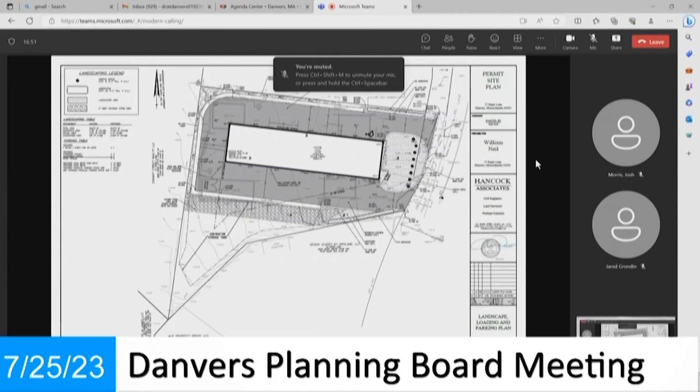Unfortunately we have this thermostat in the way, but the outdoor storage area is marked on your plan with a note. The outdoor storage area is all in this section here, up to the edge of the travelway. And what exactly will be stored there? Heavy equipment, such as backhoes, trucks, dump trucks, excavators—contractor yard equipment that's typically stored outside.

No other questions right now. Jean, questions? Can you talk about the current operations, and is that going to remain the same, like the hours, etc.? Yes, Mr. Neil has been operating at this site since 2008, and there won't be any change in his operations, other than they will be neater.

What are the hours? 7 to 3. Okay, the hours are 7 to 3, Monday through Saturday. Identify yourself for the record. My name is William Neil, owner, 17 Popes Lane. Thank you.

Any other questions, Jean? No, that's it. Tori, questions? I have no questions. Lou? Yeah, just a couple of questions.

Just following up on the question about the use of the property—so the use is going to be, in essence, the same as what has been before? Oh yes. Okay.

The only thing I wanted to note—and maybe this was just typographical—but in the stormwater report, it referenced construction of a self-storage facility. Was that just a typo? That's a typo. Okay, got it.

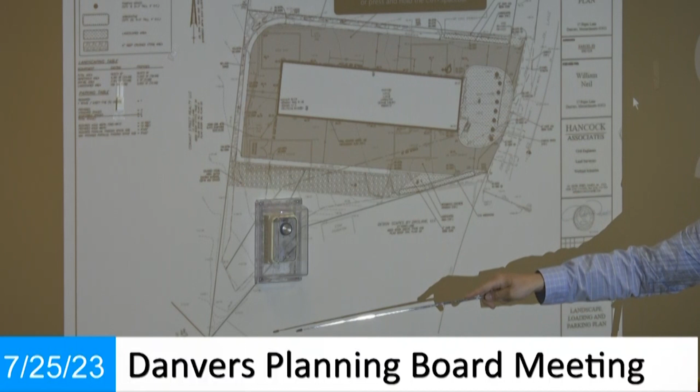Is that going to be improved upon, or is the existing fencing going to remain? There'll be landscaping over here for screening, same with over here. This fence up here is a newer vinyl fence, relocated to the property line a couple weeks ago, so it's already a nice fence.

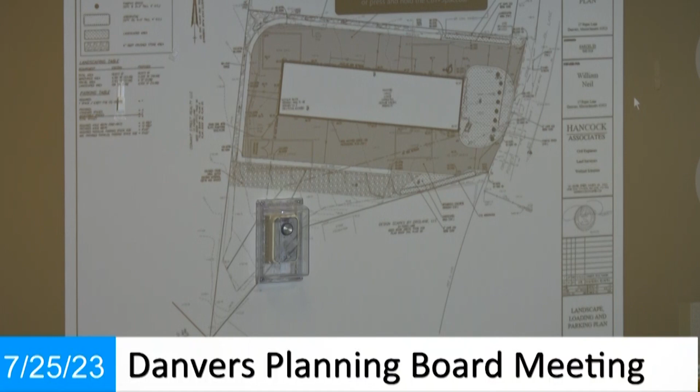No outdoor audio over there? Keep it quiet. And I didn't get the hours, I don't think we heard them for the record. The hours are 7 to 3, 6 days a week, not Sunday. Is there going to be any deliveries of material, or just strictly vehicles? Just vehicles.

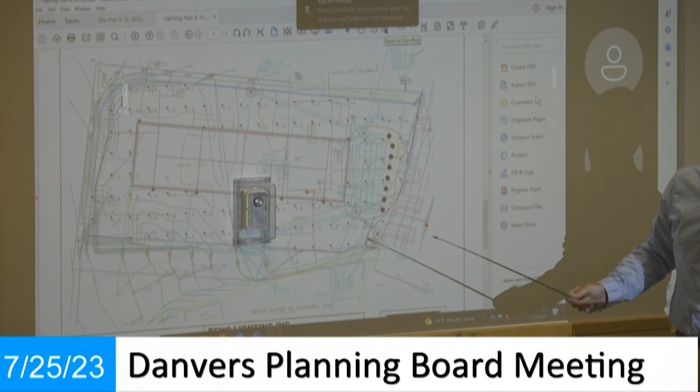We're proposing a ground-facing light over each garage bay, facing down, and two just on the back corners of the property, also facing down, more for security. The ones in front of the garage doors let you see what you're doing when pulling in and out. There'll be 0-foot candles at all the property lines. This wall surrounding the building will provide protection from any light going to the neighbors, and we have a line of arborvitaes here and here which will also protect the neighbors.

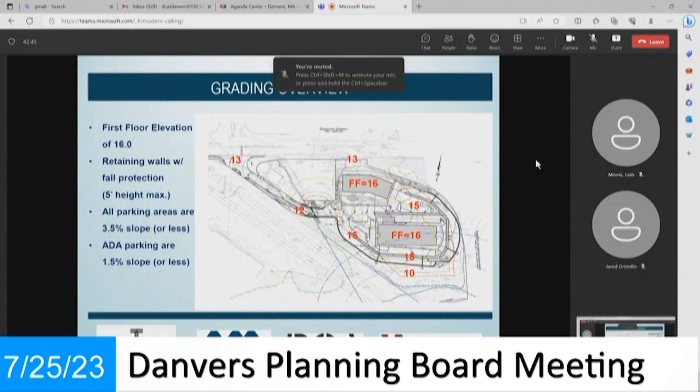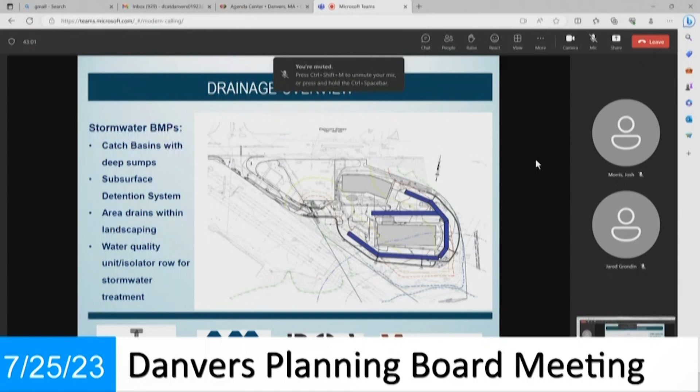So we have an underground detention system that's going to be located in the blue section. That is a water quality unit with an isolator row, and there's 4 discharge points to the rear of the site punching through the wall. Next slide, please, Josh.

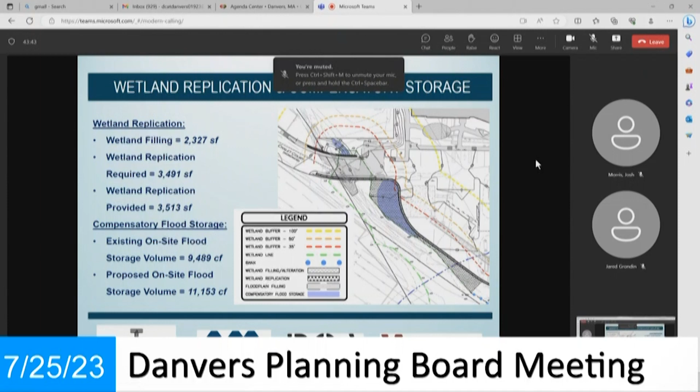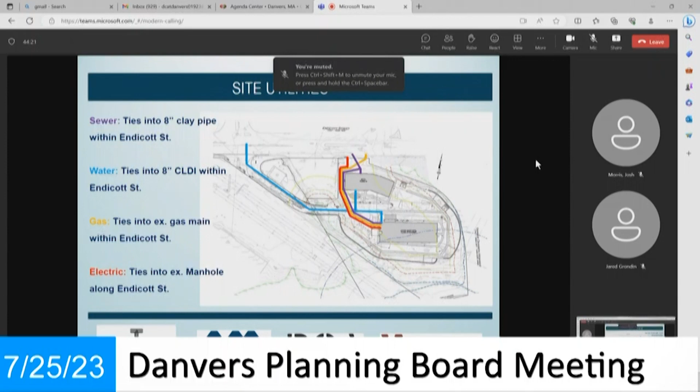Utilities are serviced with water, gas, sewer. We're tying into an 8-inch CLDI. Everything ties into Endicott Street right now. There is a proposed sewer pump station that we're working with the town on. We do have a location just to the left of Chalet Court as you enter into the site. So we are providing a location for that sewer pump station that's been in the works and planning for quite some time now. Next slide, Josh.

We are using the Viper. It's a 23-foot tall light, 6-inch reveal. All of this is dark sky compliant. This is LED, you can actually use your phone to dim these lights. Everything's going to be direct down with shoebox cutoff fixtures. Next slide, Josh.

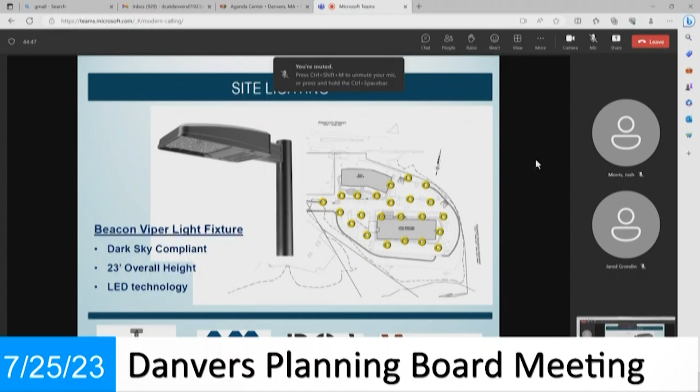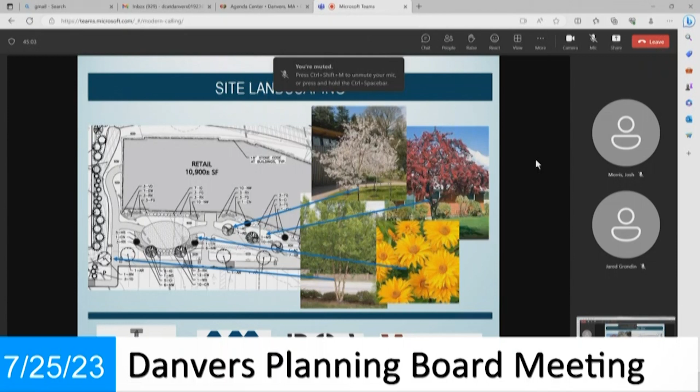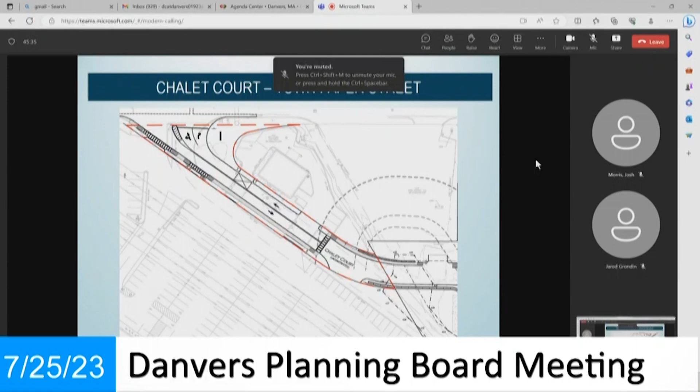So this is in red, this is the right-of-way in Chalet Court. This is a 40-foot wide right-of-way. We are proposing a 24-foot wide road with a 5-foot sidewalk that connects into Bed Bath & Beyond. We are controlling and having all of our improvements within that right-of-way, not going outside of it to make anything work. There are some parking spaces that would have to be reworked on the neighboring property. So next slide, Josh.

All right, with that, I'd like to turn it over to Jeffrey Dirk, who's going to talk about traffic. Thanks, Bob. Good evening, Mr. Chairman, members of the board. For the record, my name is Jeffrey Dirk. I'm the managing partner with Vanasse & Associates.

As you heard, I'm the transportation consultant on the project. So as you've got the two items the chair mentioned before you, I'm going to talk about the overall transportation study, which looks at Chalet Court's adequacy and design. I'll also follow up on what our attorney mentioned about the history and layout. More importantly, I'll focus on the creation of Chalet Court as it relates to access to this property, because it's important to look at how to access the property, the need for Chalet Court, and our coordination with the abutter.

But first, I'm just going to focus on the transportation assessment. We did prepare a full transportation impact assessment, and as the name implies, it looks at all modes of transportation—pedestrians, bicycles, and transit users—as it relates to the project, but also existing conditions in the area. That does form the basis of some of the improvements we're recommending as part of the project, which we will undertake with the requisite approvals.

The project, as we've looked at it and its impacts on the roadway network—our findings are that it will not have a significant impact on traffic operations. So when we talk about traffic operations, we're assessing what you experience on the roadway: delays, getting stuck in traffic, and how long you wait at any of the signals along Endicott Street. Those delays translate into backup, or how much queuing happens at an intersection. We're looking at those parameters before and after the project's traffic is added.

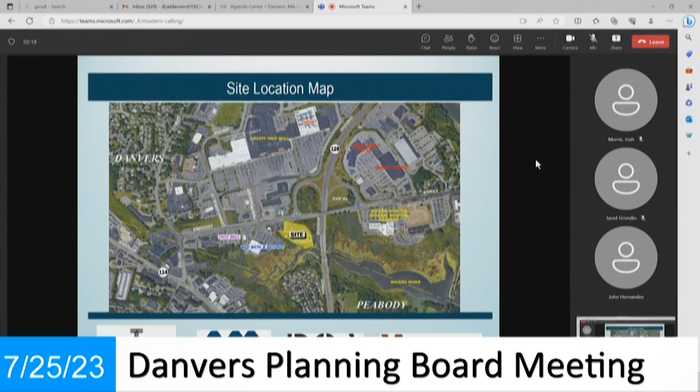When you look at the layout for Chalet Court, the planned improvements, you'll see we're establishing that connectivity at a signalized intersection with push buttons to be able to cross the street itself.

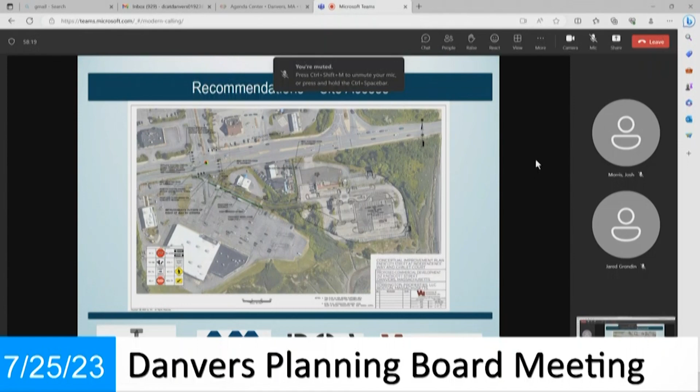So they establish no access lines to make sure no one can build a driveway opposite a ramp or some place where it would interfere with state highway operations. The other reason is to plan for future improvements. If in the future the state decides they want to provide a slip ramp onto the highway, they want to make sure no one builds anything in that area, to the extent that the Commonwealth would then have to purchase that property from a private owner. So they go in advance and establish these no access lines.

This property was actually developed prior to the establishment of the no access lines in this area. So when the Commonwealth recently updated the no access lines, they established one along the entirety of the property that actually did include the existing driveway. For some reason, they never enforced that provision. So the site was allowed to operate with the Denny's and the hotel there, and the Commonwealth never came in and asked for that driveway to be closed. But there is a no access line that goes right across that driveway.

The intent of the state was to have this driveway closed and Chalet Court constructed. But because Chalet Court was never constructed, they never enforced the no access restriction here. However, there is no access allowed to this property.

We went to MassDOT to see if there was an opportunity to retain this access, and in fact maybe move it so that it could come out opposite the ramps here. We had several discussions with the Boston office about what that might look like and what the requirements are. We do not have rights to that access. We have to demonstrate to the Commonwealth that creation of that access will not hinder the use or operation of the state highway system.

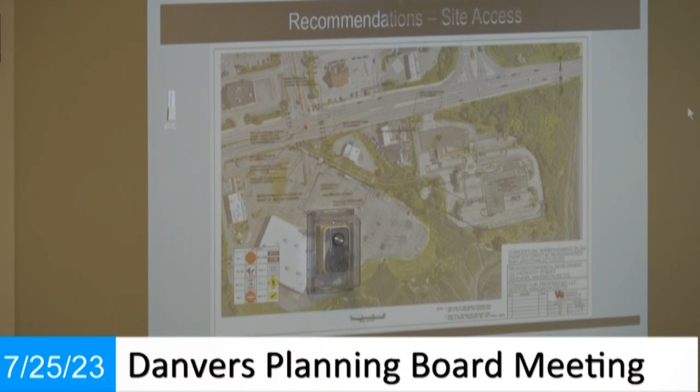We can go to the next slide, because I think that'll follow up on some other points I wanted to mention. One of the mitigation items, as we're reconstructing that intersection, is that the whole Endicott Street signals are part of a coordinated signal system - they're all interconnected and talk to each other. One reason you get that 30-mile-an-hour speed along the corridor is because it's timed so that if you go faster than 30 miles an hour, you're going to hit a red light at the next intersection, keeping traffic flowing within that speed.

So what we're doing as part of the project, as we reconstruct the intersection, is retiming and implementing an optimal coordination plan for all the signals along the corridor. As we looked at the impact of that with our added traffic, retiming the signals and reconstructing the intersection with Independence Way and the new Chalet Court, traffic operations after these improvements will be either equal to or better than the conditions that would exist if this project was not built - basically a betterment or no-harm condition over what we term the no-build conditions.

So what we're doing is essentially not only offsetting the impact of the project, but in some instances, like the Chalet Court case, we're actually making things better by reducing delays or vehicle queues or both at the intersections. That's again a mitigation commitment as part of the project itself.

Lastly, as I mentioned, we do have opportunities to reduce traffic and parking associated with the project - transportation demand management measures. We have a series of recommendations the applicant will undertake, designed to make sure people understand there are opportunities using bus service, walking, and biking to the site, providing information on availability, service routes, and times for the MBTA service, to not only employees but also hotel guests.

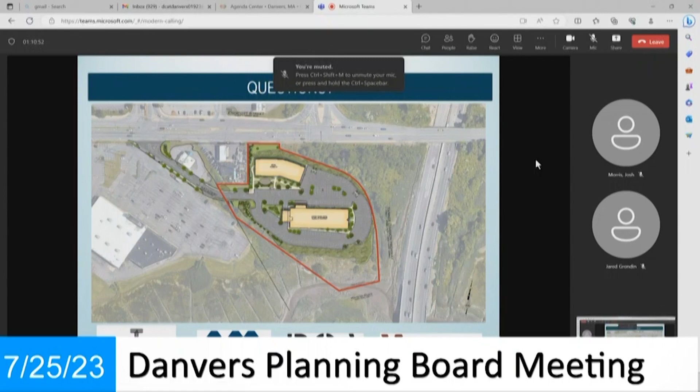Based on some schematics provided by the abutting property owner, there was a desire for a driveway close up to this area, and also a desire for a driveway back here. I think what'll happen is, if someone's trying to get out of the driveway close up here and there's one or two cars queued, you're going to need to wait to get out. I think it's not going to be much different than what would happen today with 1 to 2 cars there, but now we're adding some additional traffic.

That's why this additional driveway in the back and the connection is important, because a frequent user of the plaza here might recognize that with Chalet Court being constructed, it's actually going to be easier to come out here and then get at the back of that queue and get processed by the signal.

What's important as we're looking at it is the wait times for someone who's exiting with the improvements in place are not going to substantially increase. It's only going to go up by a few seconds, so the wait times for someone exiting is not going to be significantly different.

But as a motorist, in terms of choosing where to enter, right now it's kind of a free-for-all, because there's no curb, no real impediment to cross and get into the roadway. So now this will actually be safer because we're organizing it into 2 driveways.

As a user, you'll decide it's probably going to be easier to come out at the back here, and you're not going to wait that much longer coming up to the signal. So we've looked at it in terms of how it will impact those users, but clearly there's no traffic really other than the bank impeding them going this way, and now we're going to have the use that's here.

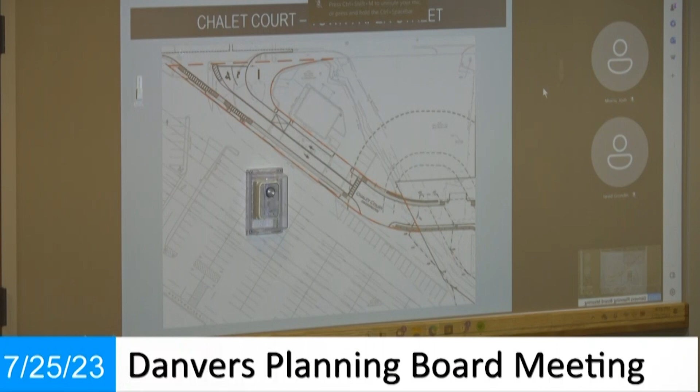So basically this is uncontrolled as it relates to accessing the Chalet Court right-of-way. Today you can just shoot across from Bed Bath & Beyond and stay there. So the issue is if you do have queuing that happens along here and someone tries to come in, potentially it's difficult to get to the back of the property that's there. So this is trying to organize that a little bit better.

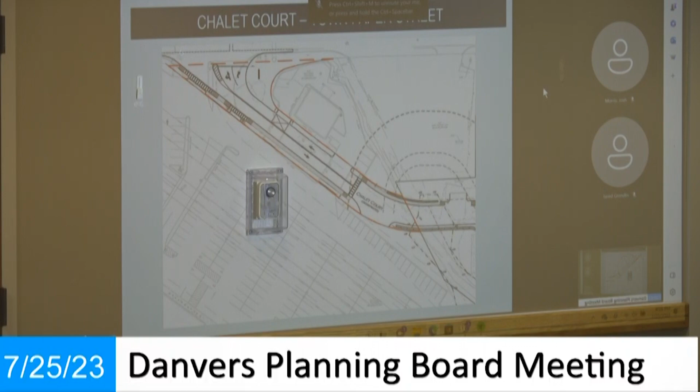But again, we'll be working with the abutting property owner to find out where they'd like their driveways along this layout. Yeah, I think that would be something very important for me to see, that you are coordinating with that property owner, because it seems like this has great potential to affect convenience of access and egress from their property. And it's an intersection that can get backed up in all kinds of ways. Right, so I think we've got to proceed very carefully and deliberately.

That said, this all looks a lot better than the Denny's. Yeah, and hopefully when we come back with a plan, after they've had a chance to digest it, we can put some flow arrows on it to show all of those different paths of entering and exiting that property, so you can see where any conflicts might arise.

Thank you. Thanks, Tori. Jean, do you have questions at this point? No, I don't have any additional questions. I think everything was answered.

All right, Tim, questions? A quick question - I know we have this letter here, so some of my questions may be based on what's in here. Does that need to be read into the record? Oh, this letter - so we're going to take the input from the applicant.

The board's going to ask its questions. Before we open it up to the town public, we will read into the record the letter from the developer, the abutter's attorney. So we're not going to get into that just yet. Okay, I did have a chance to look at it, so if you had questions related to it, I don't know if it's out of line, but I can certainly try to answer some of them.

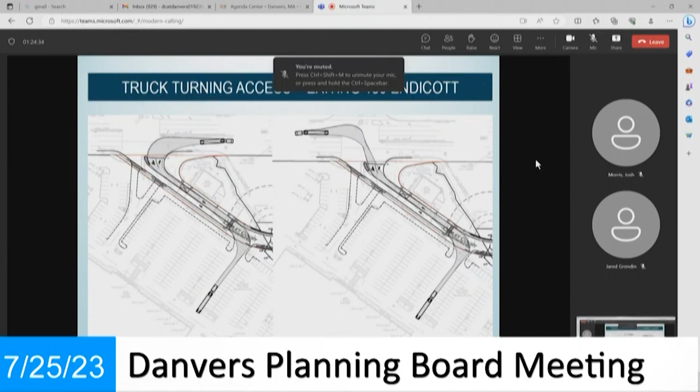I think it's important to know that we were trying to make this work within the right-of-way that was there without having to utilize their property. Obviously we're trying to make those connection points. We did an overlay of what they gave us versus what we have, and we feel it's obviously very close, but our goal is to work with them. We want this to work for everybody. It creates a nice, safe access point to our site and to their site. So it's just an effort between us and them really getting together now that we've put this forth and they've had a chance. I think we sent the TIA back in May, and we sent the overlay and these plans probably about 4 weeks ago. So now it's really working together to figure out how it works for everybody. But the goal was to make it work in the right-of-way because it was designed for that intent.

Understood. That's it for me. Thanks.

All right, thanks Tim. Just a few questions. Trying to understand the movements between the two buildings, between the hotel and the retail. Is there going to be some wayfinding and/or demarcation to differentiate the parking for each site on the plan, or maybe you can indicate that?

Yes, so we have two-way coming in, one way in and one way out here. There's a 24-foot wide road, these are all 24-foot wide. There is head-in parking here, there's an island in this location, there's parking here, parking on the perimeter. So you can circulate around here, flow back out. You can come in here, flow all the way around the hotel. This is 60 feet from here to here, which is an 18 and a 24-foot drive lane all the way around, two-way circulation.

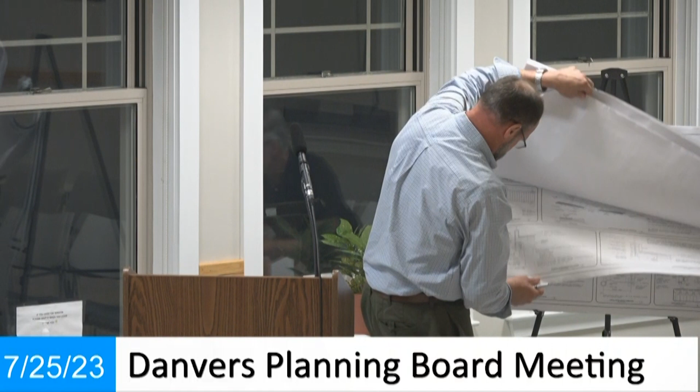We can obviously consider 8 feet if it's not already proposed on the plan. I believe the town, after higher than 7 feet, you've got to get it all permitted anyway, so it would just be showing on the plans.

That's just a concern, but I'm assuming that the only people who would have access to the trash are going to be the employees of each facility. Yeah, for the most part.

I'm sure you're going to go over some signage - do you have signage that you're going to propose that's off the building? Is there going to be a marquee sign? There would be a sign package under separate submittal.

If you want to go back to the elevation, Josh - right now they are proposing 2 signs on the building facade, one on the front and one on the rear of the property. There's a sign right there that's on the Endicott side.

And then if you go forward, Josh. That's the beginning slide, so advance it, go forward. So there's the back.

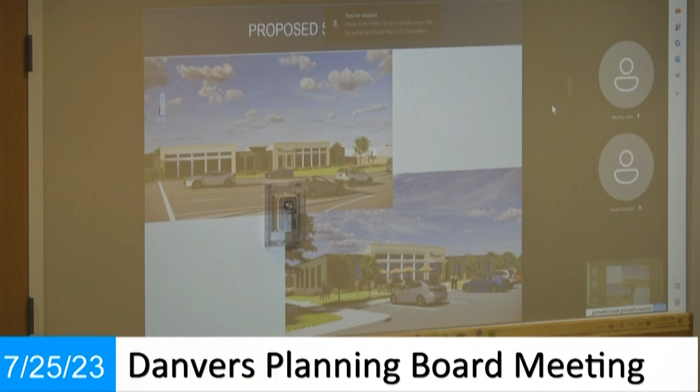So we're not putting a billboard on 128. If you go to Chalet Court, Josh, keep going forward - we are showing a monument sign in this location within the right-of-way, and that would meet the square footage requirements of a monument sign.

So you're going to have a marquee sign out front there that will - correct, it has tenants on it, calls out Fidelity and whatever hotel comes. You'll share that with the current - would it be for tenants of this development, or just for this development?

Yeah, they have their own - further down, right now there's a right-of-way, it makes sense to put it here versus in this location. So there is one shown on the site plan, and we would be coming in with a separate sign package, most likely to the ZBA, for that extra wall sign.

Yeah, we would need to see those as well. The signs would typically go, we would see the signs. And the wayfinding signs and directional signage inside the site, showing the movements inside the site, we would get those as well. Okay, we can add that.

Okay, great, thank you. All right, I'm sure you're going to pick up, so what do you have left for us? I'm assuming you have landscaping, maybe concept plans, colors, snow storage, and the drainage study. Anything else I'm forgetting?

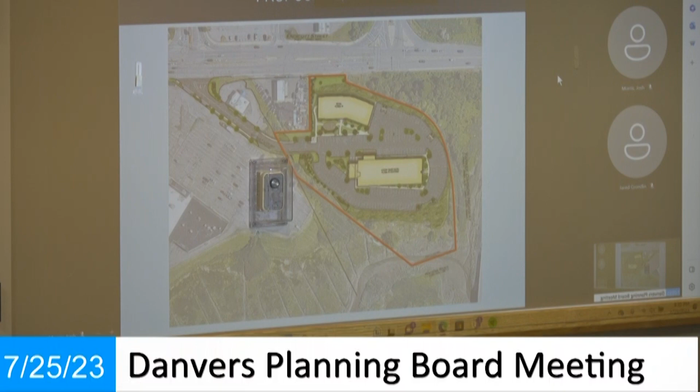I think this is the last slide, Josh? If you want to go back to the lighting, I can go over the lighting again. Oh, okay. Are you going to present, is that your presentation on the landscaping, or do you have a landscape architect? I'm actually a landscape architect as well, if you want to get into plant species and specifics on trees.

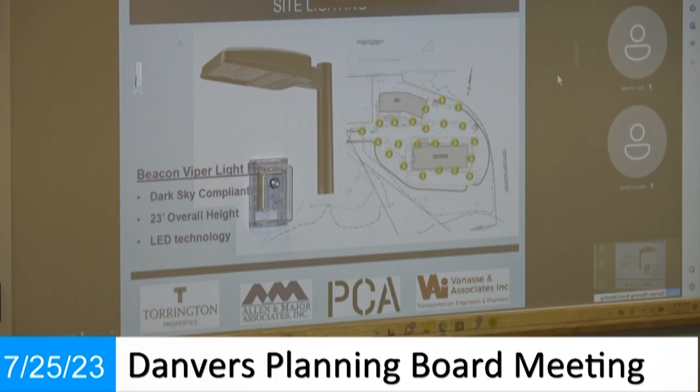Yeah, there's a full planting plan and planting schedule in the plan package. I don't need that. I'm just, do you have the percentage of landscaping versus impervious surface once you're completed?

Yes, so the slide on the front shows the zoning that we are at. The impervious cover is required at 80%. We're at 53%, so we far exceed, we're under the 80% max. There's existing 69%, so we're increasing the green in the impervious surface coverage. There's also the building coverage, which is 50% required max, and we're at 14% coverage on the building.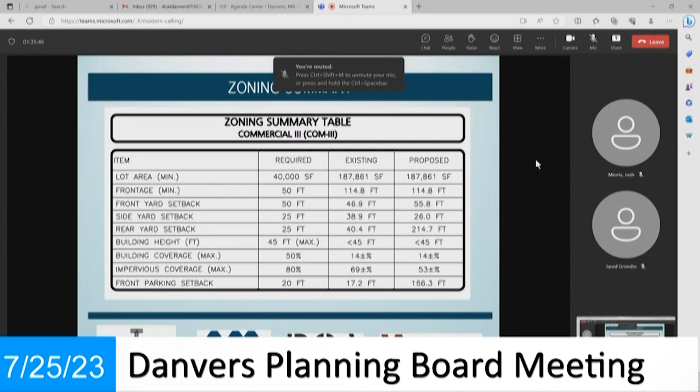When you go back up to the parking table, I just had a question on that, that you started with, I think, originally. You mentioned the 180 spaces. Is there gonna be, how are the spaces gonna be, do you have the breakdown? Yeah, that's on the plan package, but I can go over it.

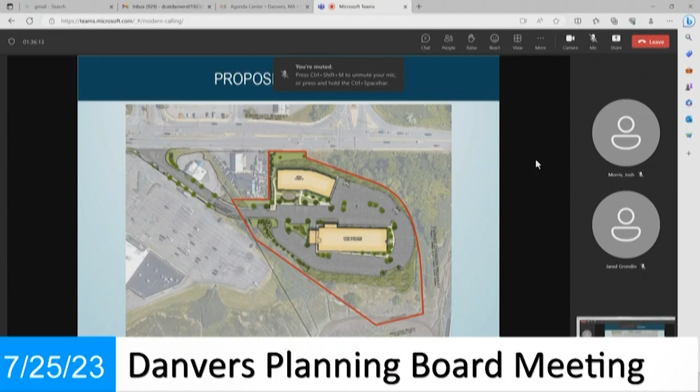Denoted on the site, I guess, on the parking, on the site? It's on the layout plan. See, you have your plan package, and that gives the breakdown. So C-102 has the breakdown.

I could go through it, I have it on my notes here. So you get one space for every room. So that's for the hotel, you've got 95 rooms, and then you have one space for each individual employee. They believe there's gonna be 6 employees at a shift. So that gets to 101 parking spaces, and we've provided 101 parking spaces for the hotel.

The retail is 1 per each rental unit, but we don't have any seats, so that really doesn't apply. So on the retail, it's 1 per 250 gross floor area, and then 1 for every employee on the largest shift. So the way that counts out is they assume 35 employees, and that's 79 required and 79 provided. So if you add the 101 to the 79, that's the 180. So the hotel's at 101, and the retail is 79 spaces.

So I guess the question that's brought up from staff is, do you believe that we'll need all those spaces? We're following the regulations of what's required and what's provided. You know, I don't think a hotel would ever be 100% occupied, but we're following the regulations that's in the zoning.

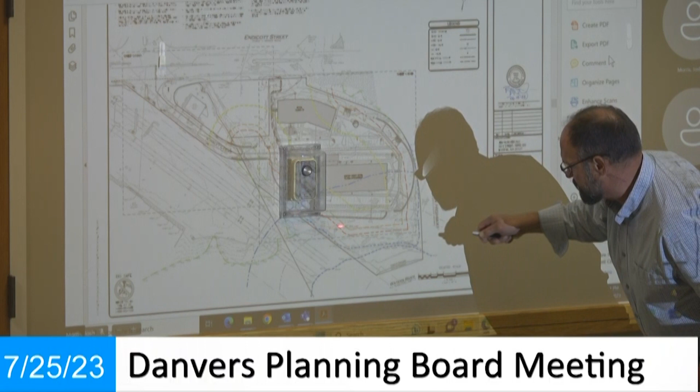Oh, I can see it. Well, it's all a 30-foot wide easement. What sheet number is that? PDF page 10, thank you. C-104.

Yeah, right there it says gas, right there it says gas. Right now that orange line is a 30-inch gas line. I see, there it is, yep. So what we did is we removed all the pavement in here, and we have an access point down. We've already met with them on site last week, showed them this access. They had no issues. We're staying out of their easement, and that was also another reason to revegetate in the riverfront area.

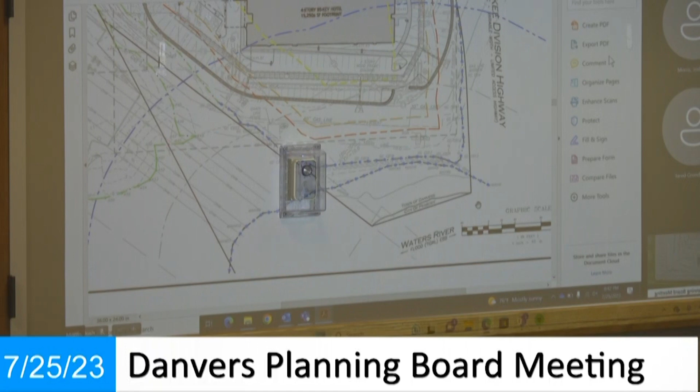Just on the landscaping, I guess, if we could just give a little detail for the record. I know you have the plant submittal, and we've talked about the percentage and so on. I assume drought-resistant plants, we're not going to have sprinklers.

Jim, where did you say the geographic location is? Where did you say you'd like to see the landscaping on the plan? I'm assuming they're drought-resistant plants, and we're not sprinkling this, correct? Or are we? Pete, do you think you're going to be sprinkling? Or is it well water, or is it going to be town water?

We have town water right now. So when you're coming into the site, we have deciduous trees planted right along the corridor here. This is where a vegetated evergreen screen is located. We have Quercus, oaks, in these islands here. Everything is drought tolerant, everything is natural, native, and we don't plant any invasive species. In this area, we have a couple of Acer rubrums, red maples, right in this location.

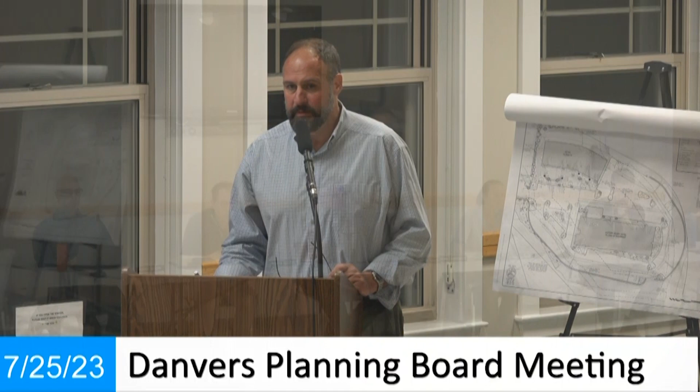Just picking up on what Gina just mentioned, looking at L401 - note 7 on the loam and sod notes says: if proposed irrigation system is not operational, landscape contractor is responsible to water with temporary irrigation. That would suggest to me that since it says 'if proposed irrigation system is not operational,' that means there is going to be an irrigation system.

Correct. So the note really means that the contractor has to guarantee the plant material - they have to water the plant material during construction. So if this is a 6-month or 8-month project, that note's intended to have the contractor on the hook for that. But there will be an in-ground automatic sprinkler system? Yeah, there will. And it's going to be tied in with town water versus well water? It would most likely be tied in with town water, sure.

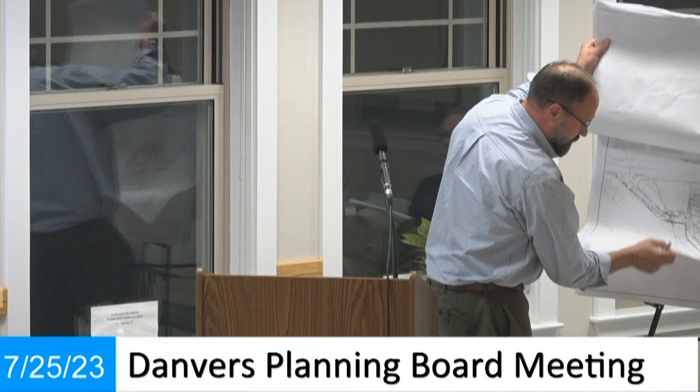Snow storage on the site - do you have snow storage areas that you're going to delineate? Yeah, so if you want to go to... not sure if we really showed it, but typically we would show it on the layout plan. Want to go to C-102, Josh? We can add in the bubbles that show and depict snow storage.

Yeah, we don't want it dumping on your nice new plants, or in the wetlands, so it's gonna be a tricky spot with all those parking spaces and maneuvers. We have a requirement, like across the street at the mall and similar commercial sites, that if we have over 10-foot snow mounds, you gotta take it off-site. You got a pretty active site there, hopefully very active with hotel patrons and customers, so you're gonna need to probably truck off a lot oftentimes, because if you're that close to wetlands and using salt, there's probably restrictions. Yeah, typically there's a condition that if the snow gets too high to manage, they have to remove it from the site.

But there are islands here, in these two locations. This location here, I don't think you're going to want to be pushing it back to the river. And you're not really going to want to pile it up against the building, so most likely they'll have to remove most of the snow from the site during big storms.

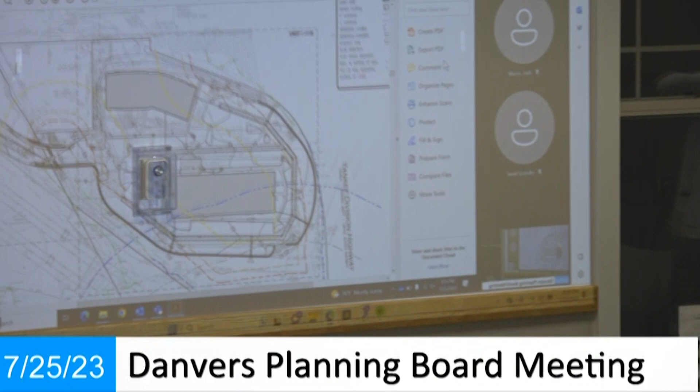So, C-103. I already mentioned the elevations of the site. We're at 13 up at Endicott. These two pads are set at 16. The overall site is 15. This is a large underground detention system here and here. There are 4 discharge points in this location, here, here, here...

So basically there's a 4-inch underdrain that discharges, and then a 12-inch overflow, so there's 1.5 feet of freeboard through this entire system. It has an isolator row, and also the deep sump hooded catch basins. We also have a water quality unit handling the road because we don't have detention out here, so we have a large water quality unit out on Chalet Court for treatment. But the isolator row, and because we're reducing the amount of impervious surface, we're meeting all the state standards for decreasing in all storm events. As mentioned, that will be peer reviewed by Hancock during the Conservation Commission process.

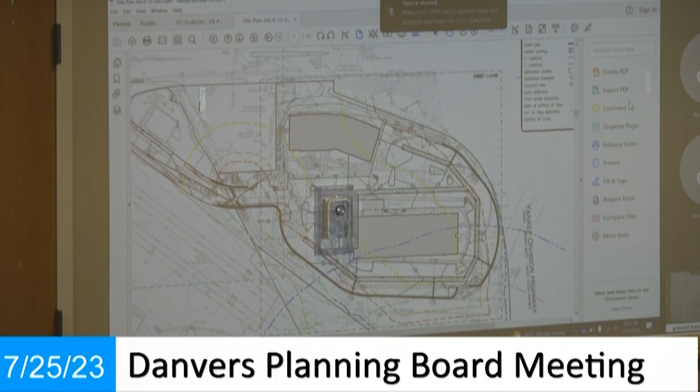Questions from the board on the drainage, or anything to date? Tori, no. Lou has a question? Yeah, just a question - it came up because looking at one of the renderings showing the outside of the building, similar to Fidelity, it looked like you had picnic tables and umbrellas. Now, my understanding from what's been said so far is the hotel will not have any sort of restaurant associated with it.

So there's not, similar to Fidelity, a cafe or anything like that planned. So if someone wants a cup of coffee, they have to leave the site, correct? Yeah, it's basically for the employees for their lunchtime - a sitting area where people bring their lunch, or have coffee, office type setting, but it's not open to the public and there's no restaurant proposed, nor any anticipated cafe. No, they have a kitchenette. Got it, no grease trap. No. Okay, no fried chicken or anything - they've got plenty of places down the street they can walk to.

Just again, for the record, could you quickly go over the lighting plan? Sure, show that please. You want the number, John? Sure. Would this suffice, Bob, on the screen? Well, yeah, you could use that too.

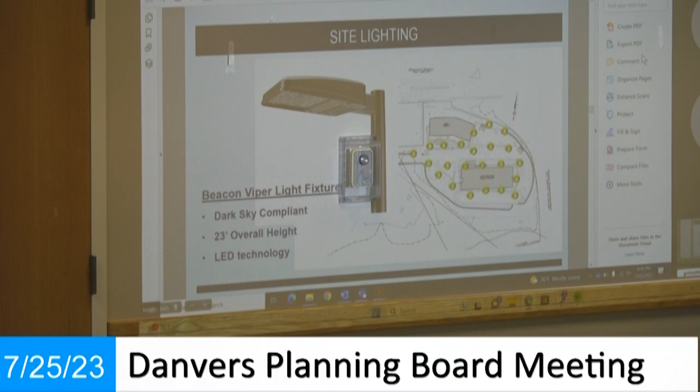We did do a photometric plan, on C-105, that shows we zero out pretty much at the property line. There's nothing proposed on the side of Endicott, between Fidelity and Endicott Street, for lighting in that location. Lighting on the buildings - do we have any bollards? Do we have lighting on the building themselves, entryway lighting - all that needs to be shown.

Good. Anything on the buildings? We'll show those, we'll add those to this plan. It's going to be minimum lighting, code required at the egress points, and like the service door for the main point of entry room. Signage, will signage be lit or not?

We'll have to confirm all that with the signage consultant. We're going to use a consultant that will design the wayfinding. They're Fidelity's preferred signage vendor, and then they'll also work with Greg and I on the monument sign out in the right-of-way. Okay.

What else? Other questions from the board at this point? I think I've got everything on my list.

Before I turn it over to the public, we are going to read into the record: Attorney Nancy McCann is representing the abutter, and she asked, because she had another meeting off-site, if she could read her concerns into the record. So I'm going to ask Lou to read that, the clerk, at this time.

Sure, yeah. As Jim mentioned, this is from Attorney Nancy McCann. It's dated July 25th, 2023, addressed to the Danvers Planning Board. Subject, 152 Endicott Street, site plan hearing. Dear board members, I represent the Anna Mrs. Trust, direct abutter and owner of the properties located at 160, 180, and 182 Endicott Street.